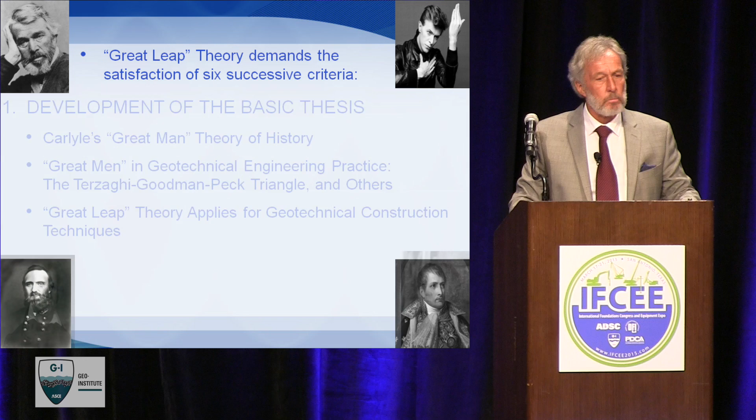Okay, so the guessing game continues, and we still have Thomas Carlyle, we still have David Bowie. That's Stonewall Jackson in the bottom left, and unfortunately that is Napoleon Bonaparte on the bottom right-hand corner.

So, to constitute a great leap, I propose that 6 successive criteria need to be satisfied. And please try and remember these as we go through the rest of the afternoon, because for each of the 3 techniques that I'm going to talk about, we're going to demonstrate how great leap theory is satisfied by looking at each of these successive steps. So, criterion 1, the project, group of projects, or application must be of exceptional and/or unprecedented scope, complexity, and construction risk.

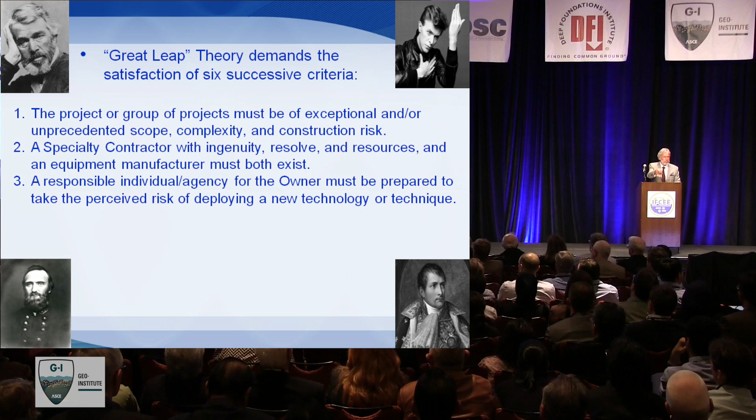Criterion 2, a specialty contractor must exist who has the ingenuity and resources to devise the solution, and there must be a manufacturer that he can work with that can provide the equipment that he needs to implement the solution. Number 3, on the other side, there must be a responsible individual and/or agency on the project owner's side who is prepared to take the perceived risk of deploying a new technology or technique, and who already knows the answer to the question, so where has this been used before? There's got to be somebody on the engineer, the owner's side, that is willing to take that risk.

Criterion 4, the projects that we talk about have got to be successful. This is clear. We cannot have a recurrence of the situation where the operation was a great success, but the patient died. So it has to be a good job or series of jobs. Number 5, to qualify for the Great Leap, details of this project must have been published widely in the scientific technical press, and not just or only as wonderful articles in the trade magazines, no matter how beautiful and informative these may be.

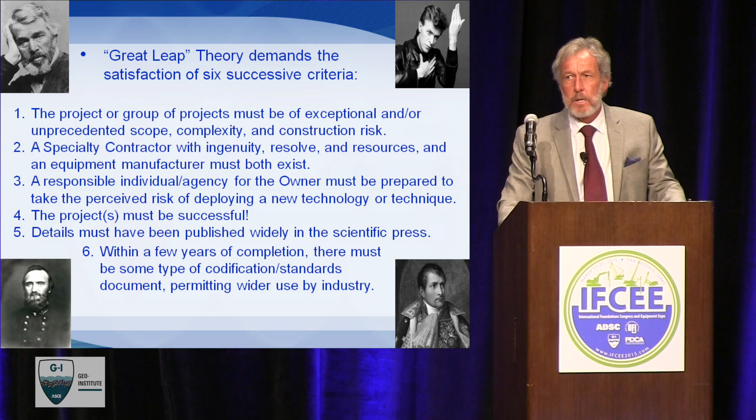And then number 6, within a few years, there must be some formal codification or other influence over construction processes to assure the legacy of the Great Leap and to guide and tutor future exploitations, the dubious defense of patents notwithstanding. In our field, such recognition typically comes through the publications of a federal agency, such as the U.S. Army Corps of Engineers, Bureau of Reclamation, Federal Highways, and so on, a professional society, such as the Geo-Institute, or the efforts of the trade associations, such as DFI, ADSC, or PTI.

The Great Leap theory can be elegantly demonstrated by analyzing progress in a limited number of specialty construction processes.

Professor Terzaghi is now joined on this slide by Admiral Lord Nelson in the top right and Warren Zevon on the bottom left. And Natalie, that one's for you.

You got it. So for this demonstration, I've chosen 3 processes particularly close to my experience and to my heart. I apologize to those of you in the audience whose particular field is not covered, such as ground improvement, the whole wide world of large diameter piling, even anchors, my PhD subject, or micropiles, where Alan and I have worked so closely together over the years. So the 3 that I intend to talk about, and those of you who know me will not be surprised: grout curtains in rock for big dams, cut-off walls for dams, deep mixing methods.

And again, I do apologize that your own particular favorite subject has not been covered, but I would encourage you, if you are moved, why don't you write a similar paper about the great leaps that have influenced your particular technology as well.

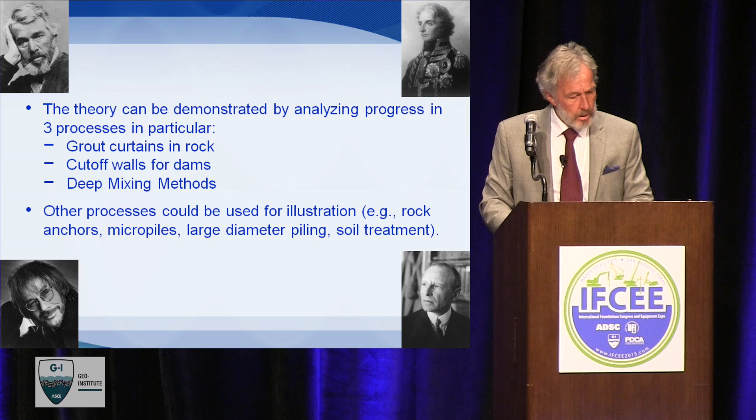Now, I have to come with a government health warning here. In the course of the next half hour or so, I'm going to be mentioning a lot of companies, contractors and consultants especially, with whom I have worked over the years and who are integral to the Great Leap theory, i.e. Criterion 2. So I'm not trying to promote them or endorse them or say that they're the biggest and the best. I'm simply making a historical statement of fact. So please don't not buy me a drink in the bar later if I don't mention your company.

Okay. So with that in mind, then we go to the fun part of the lecture. So this is where we're just going to make it up as we go along. And I have my board in front of me, and so I don't have to turn sideways. And at a time like this, especially before dinner, at the beginning of a conference like this, I don't think it's just satisfactory that you be educated. I think it's important that you be entertained as well. So those of you who have come here with your notebooks ready for fourth-order differential equations will be sadly disappointed. Those of you who would really like to see, thank you very much for that.

Right with you, brother.

Those of you who are here maybe to look at some cool bits of equipment, nice jobs, some of which you may have been involved with, that's the kind of talk we're going to have for the next half hour or so. So, grout curtains in rock. And remember, we have 6 criteria that define the Great Leap. And the first one is that the project's got to be exceptional.

And right away, we say here that there's a group of projects that kick-started the Great Leap in curtains in rock. And they were a group of projects from 97 through to 2007 involving deep remedial curtains in karstic limestone. Now, for those of you who have not had the pleasure of working in karstic limestone, a few words. Limestone has joints in it. Over the years, these joints erode, create caves. Karst is a word in German associated with cave. And so many of our dams in and around the Mississippi Valley are sitting on karstic limestone.

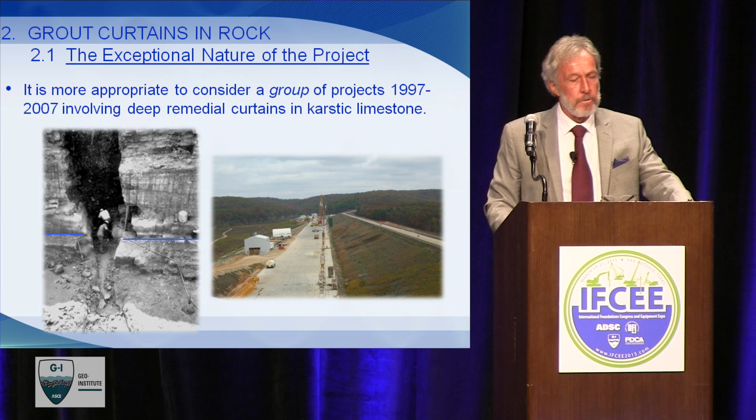Most of these big karstic features you can see on the left-hand side here are clay-filled. And so with time, as the reservoir works on these features, if they haven't been previously treated, this material will erode and will cause a dam safety incident. And we're not just talking about wee dams or little dams. We're talking about gigantic, big dams. That's why we're the conference on large dams. It's not a conference on little dams. And so we have dams that are hundreds of feet high and thousands of feet long.

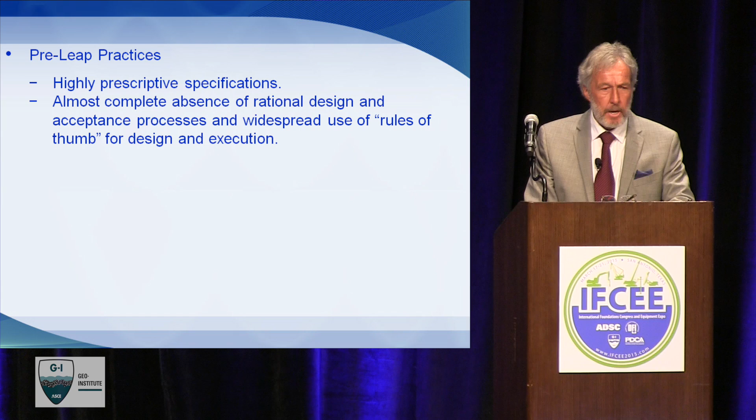So in drilling and grouting, the pre-leap practices, this would have been the state of affairs from maybe 1900 through to about 1985. Very prescriptive specifications. Complete absence of rational design and acceptance processes, and a widespread use of rules of thumb for design and execution. And from the technical point of view, these would have been the features that marked the kind of work that was done until quite recently. And all these, incidentally, are bad things, okay? So even if you don't know about drilling and grouting, just assume that this is just not good news at all. And especially the last one.

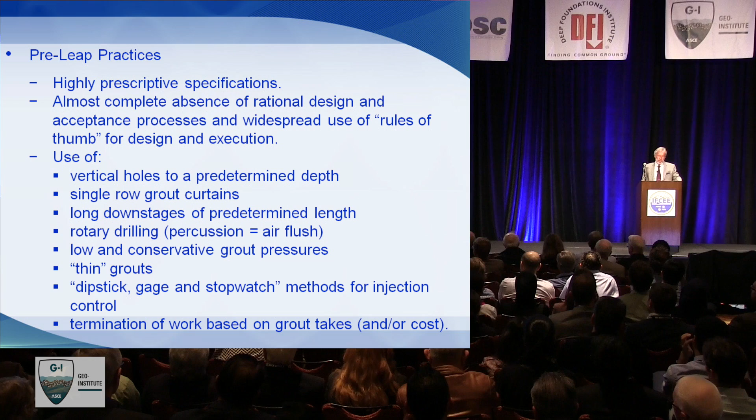Many of our dams that we work on, for example, in the Tennessee Valley Authority, back in the day, were unsuccessful because they were grouted not to a residual Lugeon value, but to a residual dollar value. And so basically you stopped when the money ran out. And when you grout in karst, you've really got to know what you're doing. So these archaic processes were completely unsuited to the demands that we faced in 1997 onwards.

Now, criterion 2, the availability of the technology. So right up until the 1990s, those of you who are in manufacturing and equipment supply will know this, there was a large momentum against new technologies. The notable exceptions were some of the US Army Corps of Engineers people, some of the reclamation people, and Hayward Baker, who promoted early computer-grouted monitoring at Ridgeway and Upper Stillwater. And back in the day then, there was the initial promotion of GIN theory by Lombardi and Professor Deere.

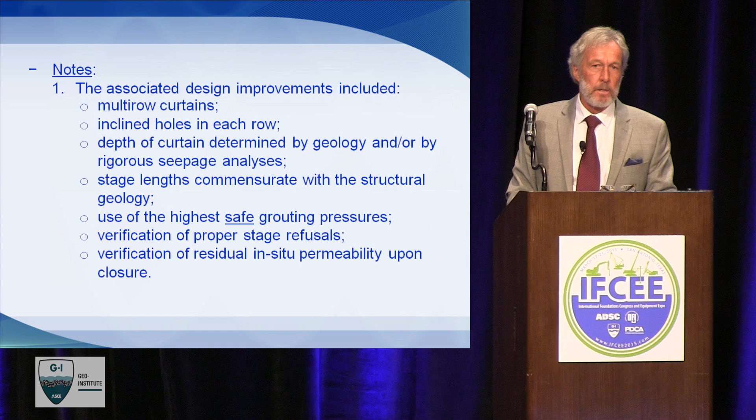So all these improvements come along. Design improvements. There's no such thing, folks, as a one-row grout curtain. It's an absolute fallacy. It's like the check is in the mail and other ruder comments of similar nature. Inclined holes, not vertical holes. The depth of the curtain being dictated by the geology, not by a rule of thumb, and various other things as well. And then once we had built the curtain, verifying the residual permeability of the curtain by doing in situ water tests. So instead of grouting to the dollar or the sack of cement, we're grouting to the Lugeon value or the centimeter per second.

So that's on the design side. That's what the Gannett Fleming team brought. Advanced, what did they do? On the drilling side, they commissioned and had built for them a new generation of drilling rigs specifically targeted for the deep grout curtain market, the Cubex company from Winnipeg in Canada. At the same time, we were looking at ways to drill through our existing dams without causing damage. And so we had the sonic drilling that was first proposed by ProSonic and Boart Longyear. And then we had the double head dry duplex system for overburden drilling as developed by Advanced themselves.

Increasingly, from McCook Reservoir in 2003 onwards, the water powered down-the-hole hammer, produced by Wassara from Sweden. And this is absolutely the bee's knees in terms of rock drilling, combining rotary percussion, i.e. speed, and water for flush and cleanliness of the fissures. We don't drill with air when we're trying to grout fissures.

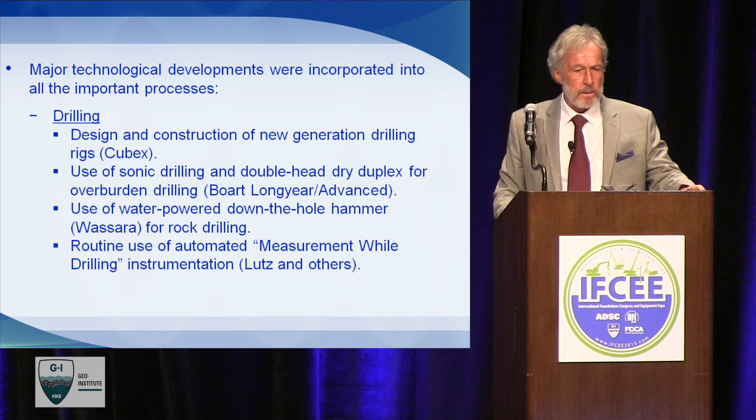And then, of course, the routine use of automated MWD, measurement while drilling techniques, such as offered by Jean Lutz and many others. Of course, other companies, such as Bauer and so on, have their own drilling performance measurement technique. But fundamentally, Lutz came with the first one, and others followed and improved upon it. And then another really interesting thing that's happened over the years is the systematic use of borehole deviation monitoring, specifically using the Robertson geologger and other devices as well. It's really quite important to know where these holes really are 400 feet down.

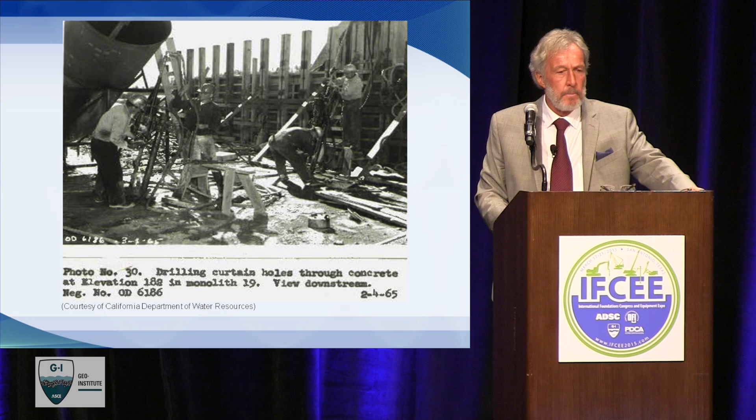So again, we are picking on California here. So here's a lovely shot of some of the early drilling and grouting work that was done on the Oroville Dam complex in the northern part of the valley. And you see these gentlemen in the aluminum helmets on the left, and that's a typical frame-mounted rig, air-powered rotary head, good to maybe 50, 60 feet depth, and who knows what kind of variation in inclination at depth. And in the background, you see another one of these little rigs.

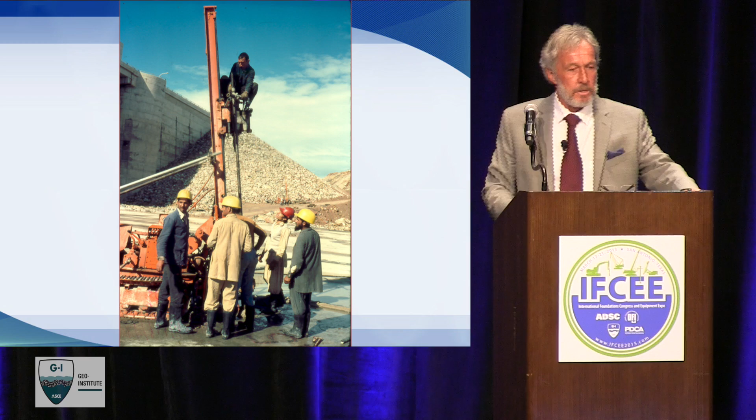And then for those of you who are really into health and safety, this is rather good. Here we have this gentleman at Tarbela Dam sitting on top of the drill head, helping to unscrew the rods as we're changing. So yeah, it's funny, but it's not to be done. So here's then what we do now.

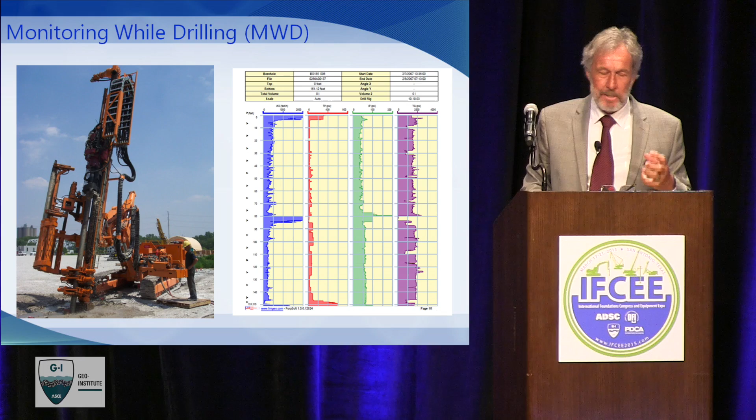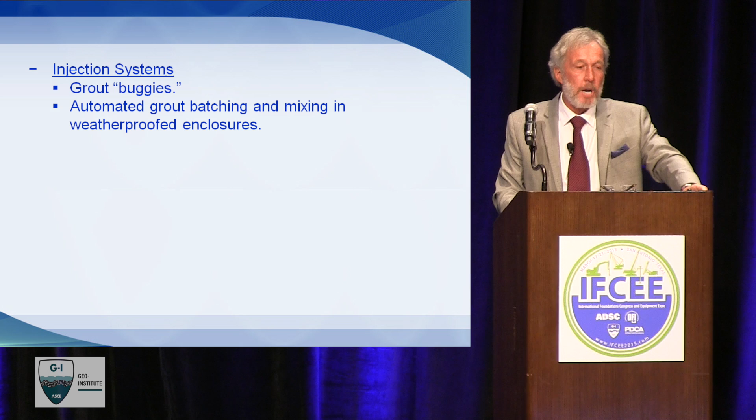Injection systems. What else did Advanced bring to the table? Well, they brought grout buggies. So what? But I'll show you in a minute. Automatic grout mixing, weatherproofed enclosures. Grout mixes. All grout mixes are not the same.

And so my old colleague Alex Naudts in Canada was the first person in North America to introduce the balanced, stable, multi-component grouts. And these give superior rheological as well as stability properties. They're not thick mixes like some people think that we have to inject at huge high pressures. It's not the case. We're getting the best of all the worlds rheologically, from a hydration point of view, and so on, by having a whole series of components, just like making a cake. And depending on who's coming for dinner, you have a little bit of this and a little bit of that to give you the desired properties.

And then we have this whole issue of pressure filtration coefficient. Now, De Paoli and I wrote a paper back in 1992 that nobody read, which is not surprising, except for Alex Naudts. And he picked the bones of that. And so he fully understood what we were talking about. And I'll show you what I mean in a second.

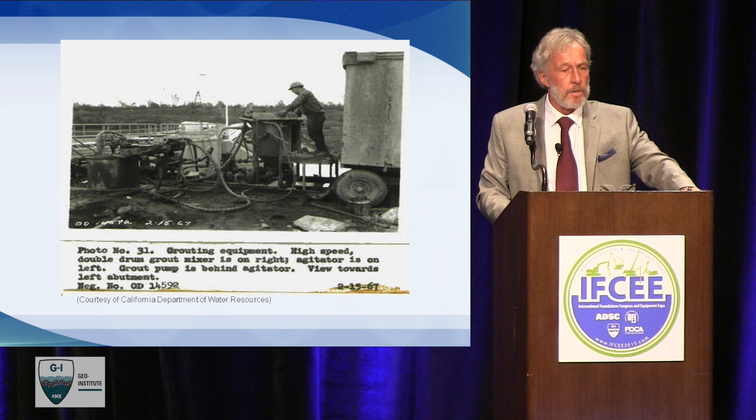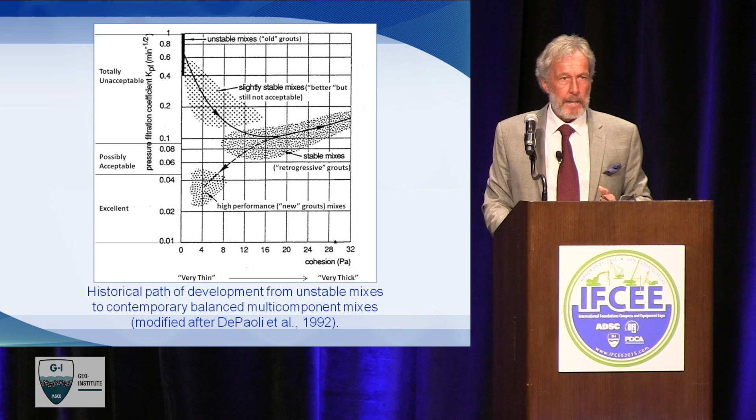Now, computer control and analysis. Those of you who know me would understand that what I know about computers you could write on the back of a postage stamp with a big felt tip pen. But as a user of these technologies, I'm all for it.

One of the first techniques developed after Hayward Baker's initial attempts was called CAGES, Computer-Aided Grouting and Evaluation System, developed by ECO and Alex Naudts up in Toronto. Soon, as a result of our work at Penn Forest Dam with Gannett Fleming, they developed a superior, different system called IntelliGrout. This was recording, analyzing, controlling, and displaying all injection parameters in real time. This allowed the apparent Lugeon theory, which allows us to bring holes to proper refusal, to be adopted—and again Alex was behind that.

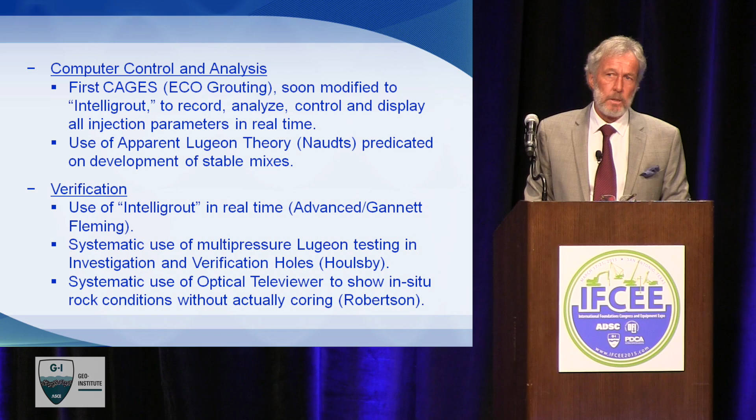We used IntelliGrout in real time to demonstrate that we could grout to a Lugeon or half a Lugeon via systematic use of multi-pressure Lugeon testing, and then the optical televiewer to show the in-situ rock conditions in the curtain without having to core—saving the whole expense of a separate rotary coring machine.

There are other ways, like the GIN method and one or two other things that Golder have introduced as well. But in essence, most of the superior work done in the US runs off apparent Lugeon theory.

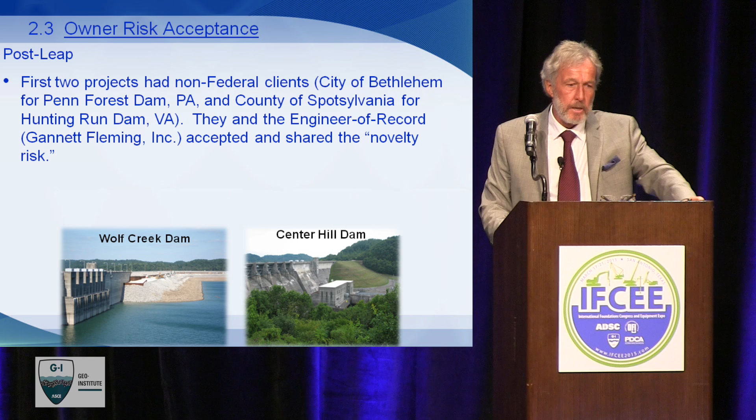So the third criterion: what did the owner think when all this came up? Well, the first two projects done with these great leaps were both non-Federal jobs—Penn Forest Dam, city of Bethlehem, and Hunting Run Dam, county of Spotsylvania. They and the engineer of record accepted and shared the novelty risk. There had to be somebody who would dive in the pool first.

Later, our colleagues in the Corps accepted the novelty risk too, particularly some districts—Louisville, Little Rock, Nashville, Chicago—backed up by headquarters in DC. The one thing in common with all these districts, other than DC, is they basically all sit on karstic limestone. So they had the problem, they had to solve it, but they showed great courage and great resolve in accepting these new methods.

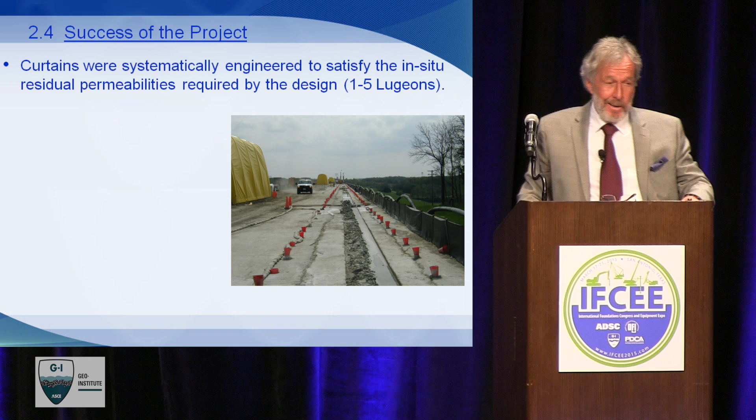So were they acceptable? Did we have success? Well sure we did, that's why I'm going to talk about them. We grouted these to very tight residual permeabilities, 1 to 5 Lugeons, depending on the target. Grout curtains were used systematically, now part of what we call composite walls, where we do drilling and grouting first, then follow up with a diaphragm wall between the two grout curtain rows to prevent long-term degradation due to movement of the karstic material.

Technical publications, the fifth criterion—have we published anything about these things? Well you bet. We've had a couple of really good conferences, New Orleans in 2003 and 2012. The annual conferences of the Dam Safety Association and USSD have tons of papers on this kind of work. There's a couple of textbooks—blatant advertising there—and every year we have the annual short course on grouting at the Colorado School of Mines, at which many of you in this room systematically teach.

And of course, presentations at the Corps' infrastructure conferences on an 18-month cycle. As I said before, we've mentioned a couple of contractors in particular, but this is now the standard of care of superior grouting in North America, and it's attracting attention on a worldwide basis.

Have we codified it? Yes. Those of you interested in this work will be glad to know that Gannett Fleming, under contract to the Corps, have now completed the revised grouting technology manual, issued as of July 31 last year. It's a tremendous piece of work, and grouters all over the world, just like Sam here, are undoubtedly tickled pink to have that on their bedside table.

But here there was a design flaw in that, having cleaned this foundation and taken the clay out of these features, the Corps then replaced that material with clay, which was not really a terribly good idea.

This dam, Wolf Creek, was designed in the 1930s and started work just before the US joined the war. Then it was suspended. By the time it was finished in 1952, you were basically looking at a design that was 20 years old, and in that period a lot of things had happened.

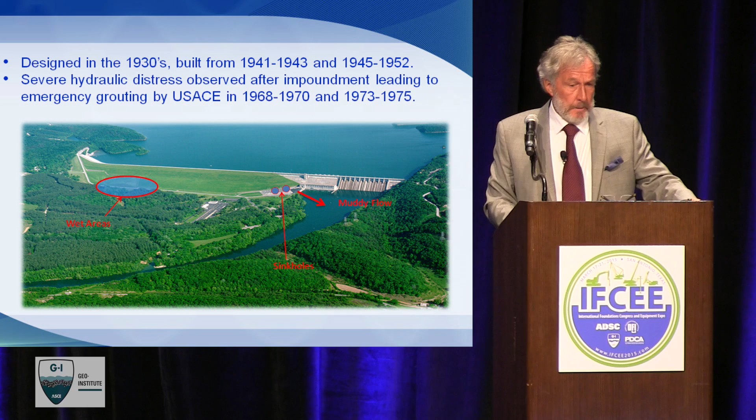So guess what? We have severe hydraulic distress after the first filling. We've got a wet area under the dam and a slowly developing sinkhole or two right there, which is bad news. Those of you who work in dams know that anything like that is simply bad news on a big dam. And then, of course, the infamous muddy flows. This is not good when you have a dam holding back Lake Cumberland and protecting Tennessee.

The primary failure mode was related to the erosion and piping of the soft material and the clay backfill. So back in 1975, the ICOS Corporation, under the leadership of Arturo Ressi, won an international competition to build the first ever cutoff wall in an active dam anywhere in the world.

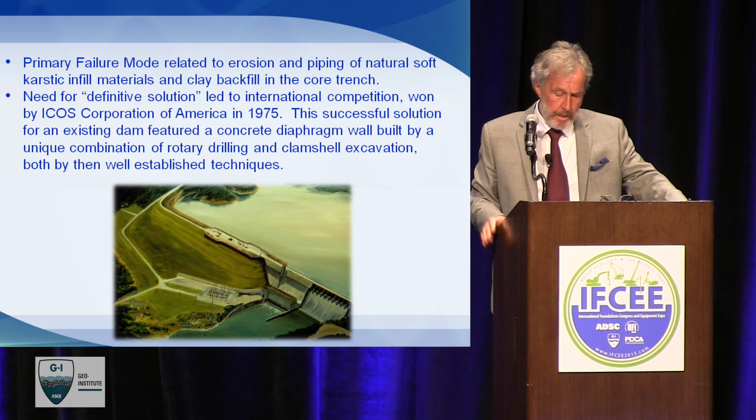This is a photograph from the 75 effort, and this is exactly what they did. There's the ICOS wall in purple. In fact, they had a wall running through the axis of the dam, and then another smaller wall down in the switchyard. But the Corps had actually saved the day in Kentucky in 1968 through 75 by doing all that grouting to repair the damage before the wall was built. So that was how the original wall was built.

It basically used rotary drilling techniques, not secant piles, but large diameter piles, and then that green bit being taken out by a clamshell guided by the adjacent large diameter cased piles. So it was a tremendous achievement that was done.

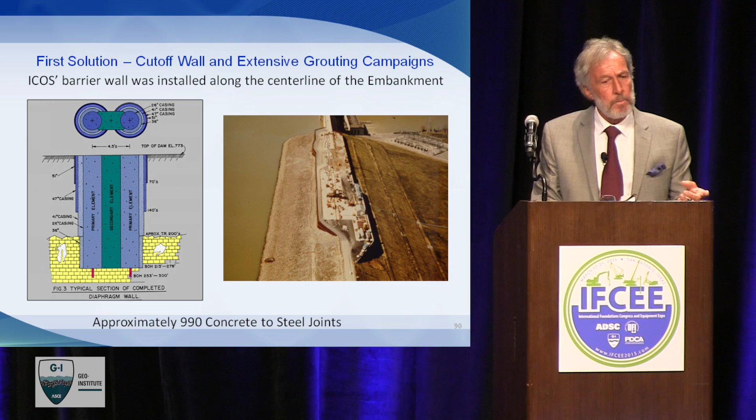However, Dr. Peck was on the original board of consultants, many of you will know this, as was Mike Duncan. And he thought at the time that the wall was neither deep enough nor long enough. Was Dr. Peck ever wrong?

By January 2007, Wolf Creek was judged to merit what we call a DSAC 1 rating, i.e. get something done right now. And there was a justification because of the return to the classic distress indicators.

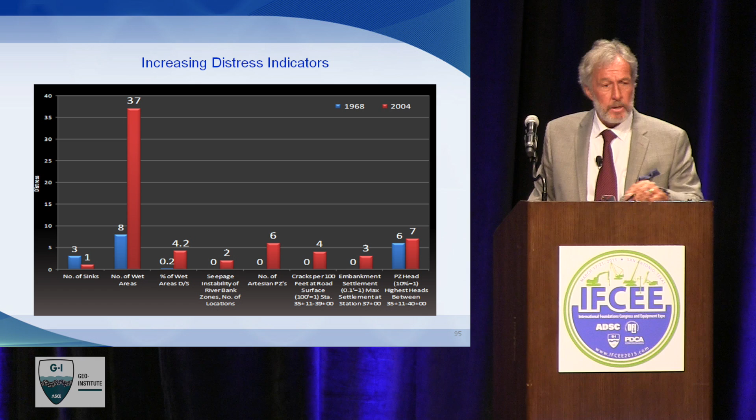Now, for those of you who don't know about dams and distress in dams and so on, lots of things can happen. You can get sinkholes, wet areas, seepage, artesian conditions in the piezometers, cracks in the roadway, settlement. And all these things were in the red zone as far as Wolf Creek in late 2006 and early 2007 when we caught it.

So there was a phase 1, conducted by Advanced and Gannett Fleming, an emergency grouting operation, but the intention of the Corps was always to build another diaphragm wall - longer, deeper, better, more expensive.

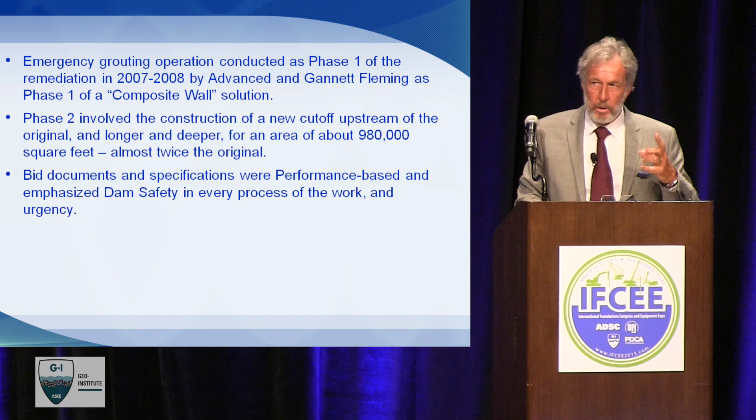So the Corps, again very prescient, released the work on a performance-based spec, emphasizing dam safety in every process of the work, as well as urgency. This is a classic example of one of these great leaps in business. Now, this problem attracted international interest - our colleagues in Germany, France and Italy were equally as interested as were our US companies.

It was obvious to everybody that what had been used and done back in the 1970s was not going to work the second time round. And so a lot of new things had to be done.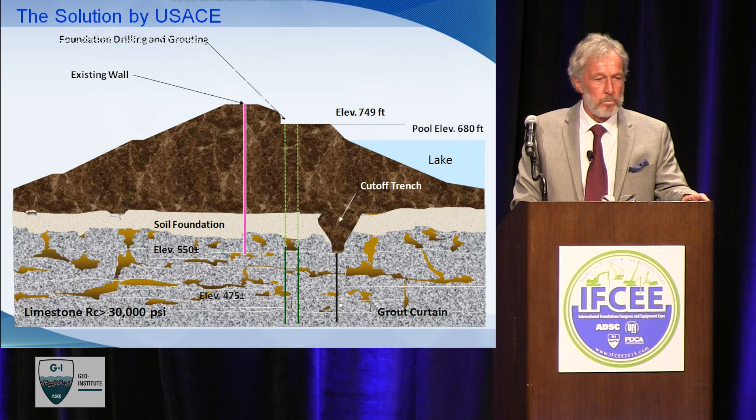And then between the two lines of the grout curtain, a deep diaphragm wall. So you can see it was built on the downstream side to save quantity, and it would completely negate the purpose of the first wall. So that was what was planned.

And just to summarize again, there's the wet areas, there's the muddy flows, the sinkholes, the existing wall that was done by ICOS, and then here's the new wall that is upstream, longer, and deeper. And I'll come to the protagonists in a minute.

So who are they? As you know, the job was done by Trevi Soletanche joint venture. Who are Trevi? Well, they had acquired the ICOS company in 1997, and so they had the mentality of what had gone on at Wolf Creek first time round. They also had picked up Rodio, who were a very fine Italian company at the same time. They had very good and similar experience at Walter F.

George Dam in Alabama. We'd also worked, as Nicholson, we had the joint venture with them at Beaver Dam in Arkansas, building a secant pile cutoff. Because of their other work, they had also particular experience in directional drilling and in water-powered down-the-hole hammers.

Soletanche, so who are Soletanche? Right? One of the great companies. Pre-war French subsidiary of Rodio. And of course, during the war, they were French, therefore they won. Rodio were Italian, and unfortunately, they had lost. And so after the war, basically, Soletanche became the dominant player in the whole Soletanche-Rodio empire. And then, of course, Soletanche combined with Bachy some years ago.

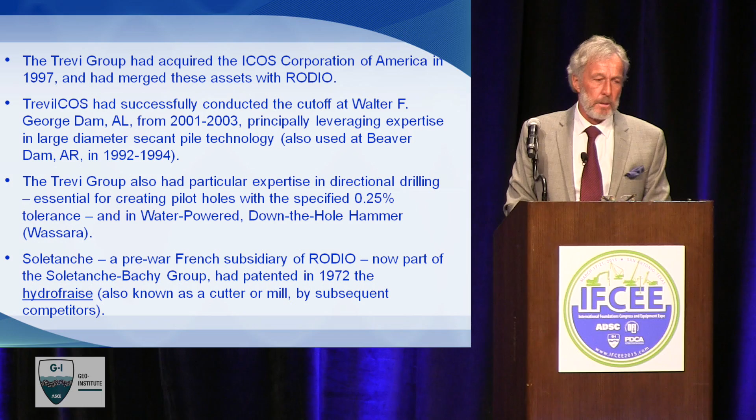But the key thing that Soletanche brought to the table was they had patented in 1972 the hydrofraise, with apologies to my French friends, also known as a cutter or a mill, and produced by subsequent competitors. Now, what's so special about a hydromill? Well, this is literally the bee's knees.

This is a big frame that you aim at the ground, you turn on the wheels, you turn on the pump, and this machine chews itself into the ground, creating a wonderful, straight, regular slot. And if you do that enough times, you create a diaphragm wall. So it's very simple. That's as complicated as it gets today on the hydromill.

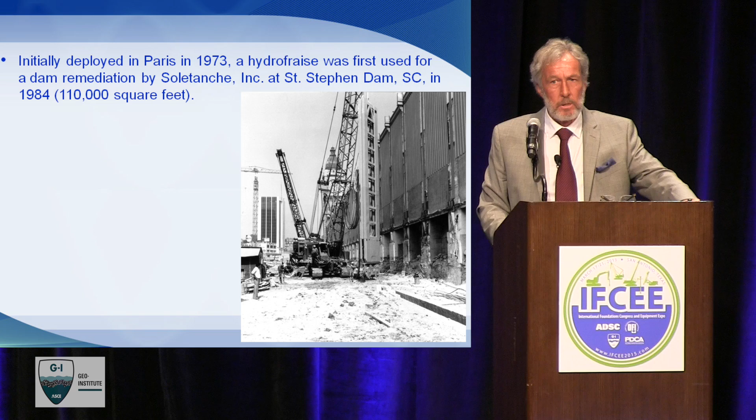So according to the information that Tom Richards gave me, it was initially deployed in Paris, 1973, and it was used for the first time by Soletanche on a dam for remedial purposes at St. Stephen Dam, South Carolina, in 1984. So Soletanche had a very long track record working on dams in the US.

Thereafter, it's been used by many other contractors, such as Bauer and Bencor and so on, on 8 other major dam remediations prior to 2008. A lot of work. And if you were able to read this, this would show that since 1975 through to 2005, there's probably been about 21 or 22 major jobs done in the US. And I think it's the blue highlights those jobs that were done using the hydrofraise. So right up until 2008, a pretty steady 1 or 2 dams a year in the US.

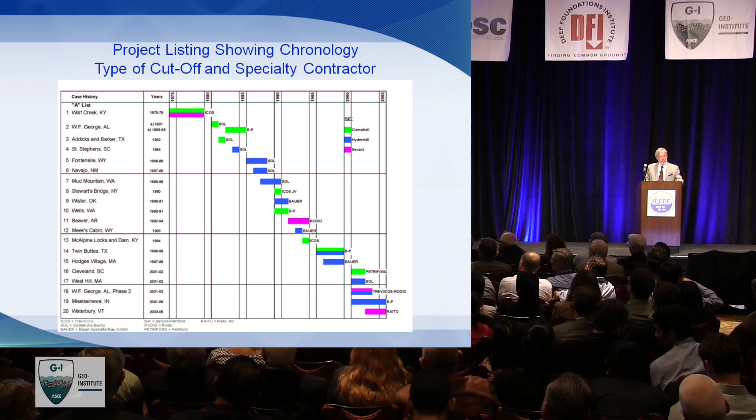Many of these projects, say, done by Trevi's partner at Wolf Creek. The deepest wall that had been constructed before Wolf Creek was, in fact, at Mud Mountain Dam, over 400 feet deep. And most recently, we hear from our friends in Italy that they have now taken this to 800 feet at Gualdo as a test and achieving 0.13% verticality. So basically, the hydromill allows you to drill very deep into hard material and guide it to a fraction of a degree of verticality. It's an extraordinary machine.

I always used to describe it as like a Formula One racing car, that when it worked, it went very fast, but it would spend a lot of time in the pits. But more recently, the hydrofraises, the hydromills, have become much more reliable from the technological point of view.

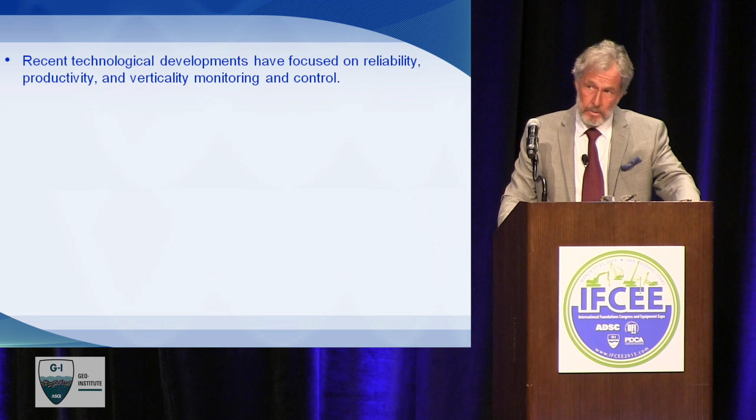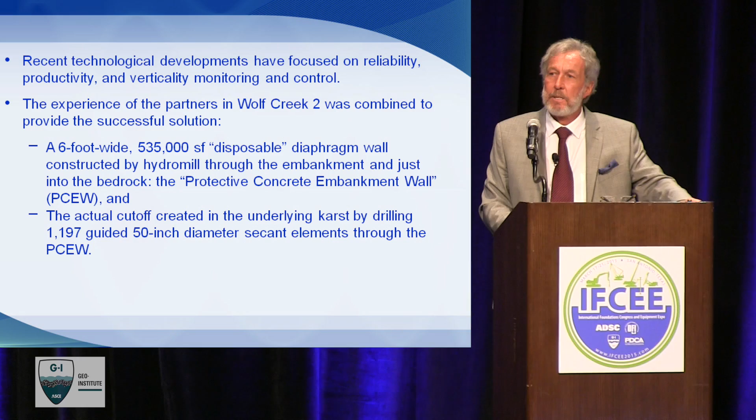So, obviously, Trevi and Soletanche get together to do Wolf Creek 2. And how do we design that? Well, first of all, we're going to build a 6-foot wide disposable diaphragm wall through the dam itself to protect the dam from the effects of the rotary drilling underneath. So it was a very clever concept. And this is what, in fact, was done. So here's a little animation just to summarize better what I just said to you. So we've got the embankment, the poor stuff, and then the rock.

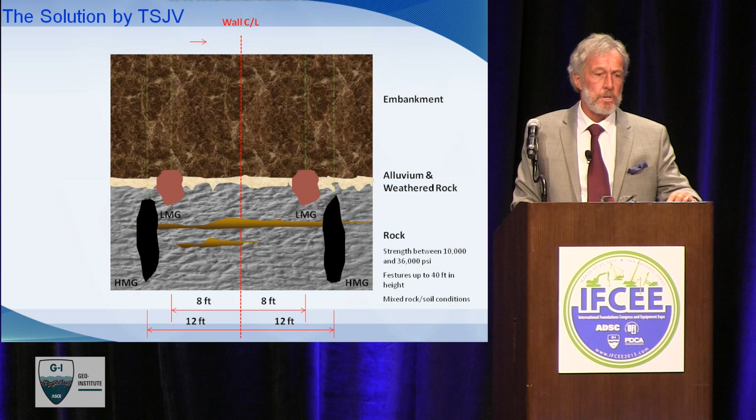Here's the center line of the wall. First thing to do is to do the drilling and grouting of the rock on either side. Remember, this is a composite wall. So what we're trying to do is to prepare the ground for the diaphragm wall. Then the interesting thing that the joint venture did was then elected to do an LMG operation to treat specifically the interface between the dam and the rock to further protect the ground for the installation then of this 6-foot wide diaphragm wall, which was taken down just to the contact.

Having protected the dam, the next stage then was to build the cutoff in rock. And this was achieved with, first of all, directional drilling, and then following up with, I think, 50-inch holes at like 30-inch centers to create a secant wall in the rock under the dam having been protected by the big diaphragm wall. Hayward Baker were engaged to do that LMG work. They completed also the HMG work that had been begun by Advanced and Gannett Fleming.

Many of you will have seen these slides already, but there was a lot of iron, as the contractors say, on this job at any one time. So here's the big 6-foot wall being constructed in the foreground. Then you can see the directional drilling, the Soilmec machines in there, controlled to within 0.1% accuracy at depth of almost 300 feet.

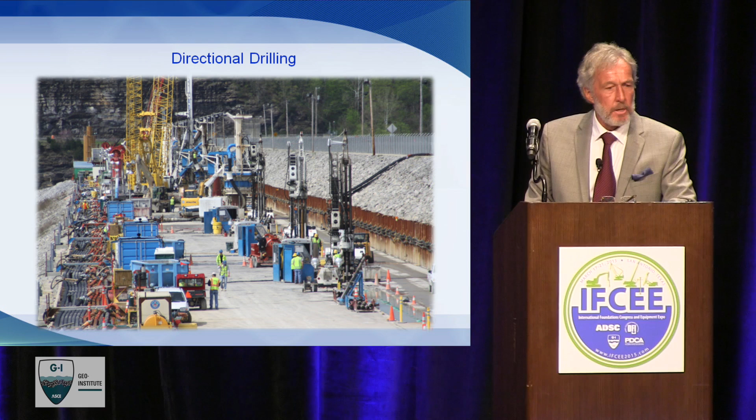And then the Wirth pile top machines installing the secant piles through the wall and into the bedrock to create the cutoff. So here you have 50-inch piles at 31 or 35-inch centers. Maximum depth 277 feet. Okay, so that was the contractor side, right?

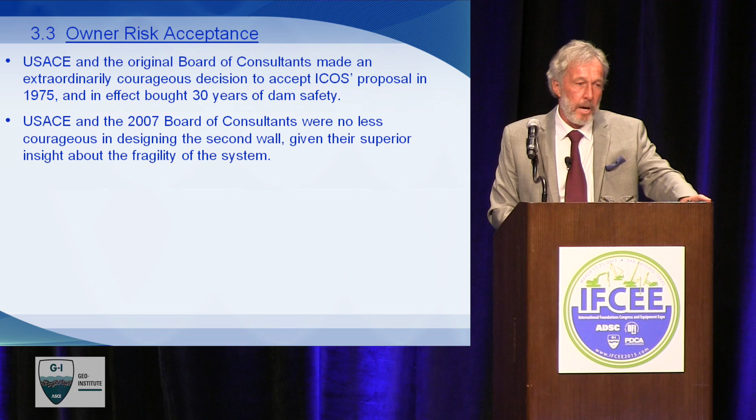Criterion 3. If you were the owner, would you have accepted it? I would have been scared witless, quite frankly. But let's remember the Corps was very brave back in 1975, and its board of consultants were very brave. And effectively, although flawed, that original work bought 30 years of dam safety to the Corps of Engineers. And I think that the Corps and the 2007 board were no less courageous in designing the second wall, given their superior knowledge as to how fragile that dam really was. It was just on the edge.

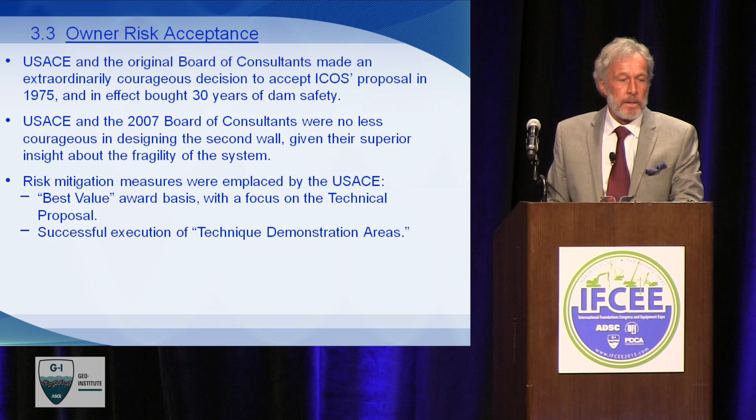Now, the Corps didn't go into this blindly, and they put a lot of risk mitigation measures together. So they awarded this job on the basis of best value as opposed to low bid. Focus on the technical proposal, very important. First, before we could move into the production phase, we had to do technique demonstration areas, full-scale tests on site to show that we could do the work and do it safely. Very high levels of QA/QC. Contractor's side and the Corps side each had over 30 people full-time on QA/QC every day.

Implementation of a very intense instrumentation monitoring plan to make sure that the dam was monitored during its penetration and during its remediation. And then there was actually very effective partnering. Partnering is often something that people turn their noses up at, but partnering was essential to the success at Wolf Creek. And not only did the two sides get together, but the Corps had its own board of consultants, but the contractor also appointed its own equivalent board of consultants. And so they got together at different levels.

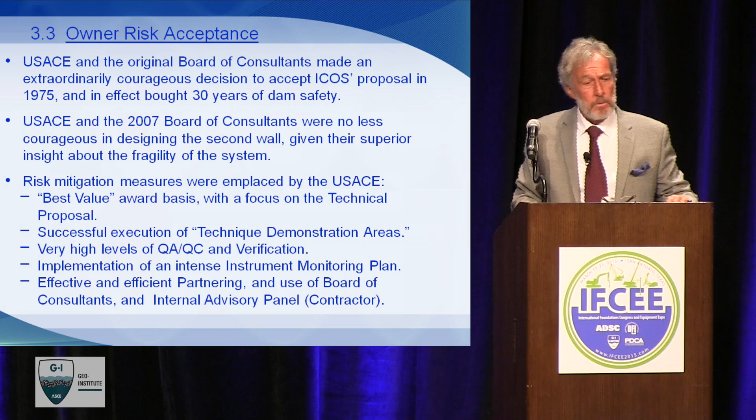And so, especially in the early days, when things were maybe a little bit hairy from different points of view, there would be these massive technical meetings at which many things were thrashed out over a couple of days. And to the great credit of the contractor and the Corps, these things went very well. So sure, as you all know, it was a success. Only one of 1,197 piles went outside the verticality criterion. Everything else was satisfied, without question. The job was finished early.

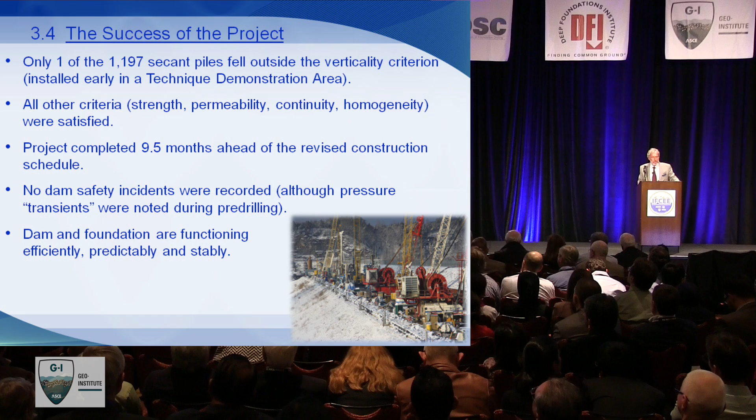No dam safety incidents. But I will say that when you drill with the water hammer, when you do grout with the HMGs, you will have transient pressure spikes in the piezometers. These happen. But as long as they're transient, your dam, which is 300 feet high and 6,000 feet long, is not going to feel them. So we're not going to explode the dam or hydrofracture it like some people think that don't fully understand what we're doing. Since then, all the indications on the job are that the dam and the foundation are functioning very efficiently. It's been a beautiful and extremely well-monitored project.

So, have we published? Well, you bet. And so, there's been at least 12 technical publications so far in the usual suspect conferences.

It's been published all over the world, Europe, US, and South Africa now as well, I understand. The Corps and the contractors have really put together a lot of very good reports that are available to you. And codification, sure. The Risk Management Center of the Corps of Engineers, headed by David Paul on an interim basis, is producing an engineering manual on cutoff walls for dams and levees. And this will enhance the existing EM. And that's going to be published later this year.

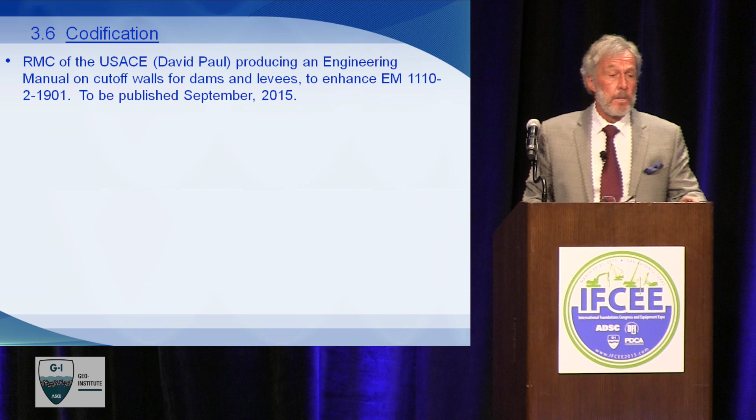Reclamation, my friend Mark Bliss, is also finalizing a new design standard on cutoff walls to be published later this year. The DFI Slurry Committee, Gianfranco Di Cicco, who I believe is here, is developing a similar guideline. Gianfranco's a wee bit further behind on schedule, but that is apparently going to be ready to go next year. And all of these publications will give new blood for the existing ICOLD Bulletin 150 and the European standard. So you can see the impact that one successful job will have on world practice, provided it is published and codified properly.

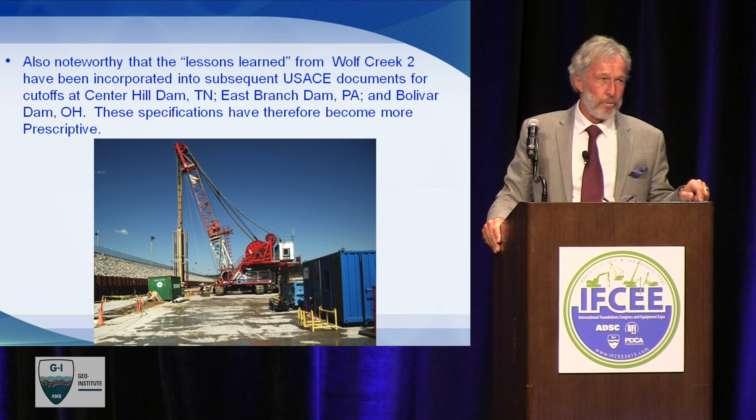And the other interesting thing, and the contractors amongst you know this, is that there's been a lot of jobs done since then. Center Hill Dam is underway with Bauer. East Branch Dam in Pennsylvania is underway with Bencor Lane. And Bolivar Dam in Ohio with Trevi. And the specifications for these jobs have become more and more prescriptive because the Corps is now saying, we understand what you're doing, you don't need to tell us anymore. So please, we'd like it done this way, and if you can do it like Wolf Creek for half the price, that's great. So that's a big influence on practice.

Now, when I was putting this talk together originally, I was going to introduce a fourth topic, which was micropiles. And I soon realized that we simply wouldn't have time, and I didn't want to run over. So what I've done here with my third topic, and we are getting pretty close to the end, Alan, is to make this a little bit briefer and a little bit more of a summary. And I'll run through this a little bit more quickly, because I don't want to delay proceedings too much here.

The deep mixing methods, many of you know about this from hearing George Filz and the other great specialists talk about this, were developed separately and at the same time in Japan and Sweden in '67. And were introduced to the US, we think, in '86 by Mr. Taki. And I'm not going to show that slide, so don't get too happy about that. So between '86 and 2008, there's a lot of large projects done in the US and Canada using deep mixing. But the market, we always thought, was very erratic in terms of the annual volume. Some years, nothing. Other years, 100 million.

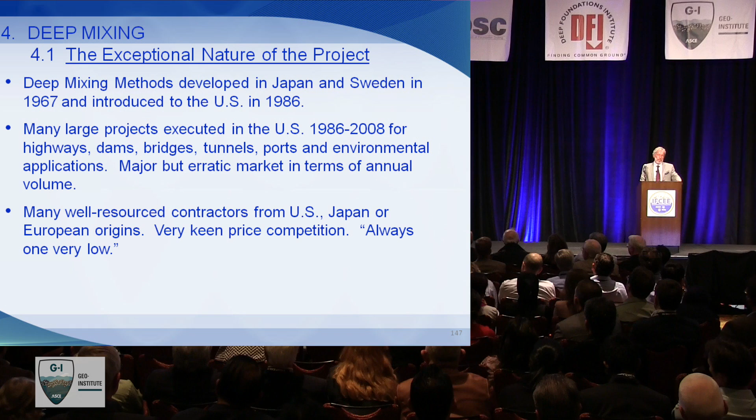A lot of really good contractors in the US from native origins, from Japan, or from the European companies, and always with very keen price competition. And my experience acting for the owner was always that on any one deep mixing job, somebody was way low. Not always the same guy, usually the same guy, but not always. And so really it kind of tore the backside out of the business to a large extent. Now all these applications until '08 were vertical axis mixing, exactly what you think that deep mixing is all about, you know, the big augers and all the rest of it, but relying on traditional concepts, methods, and monitoring.

Some of the project outcomes were not really satisfactory. A lot of debate, a lot of unhappiness, differences in expectation between what the owner thought he might get in deep mixing and what the contractor thought he was providing. Neither of these jobs that you see here were anything other than completely successful, incidentally. Just to say, that's Raito's project down at Clemson on the left-hand side using their 6-auger machine.

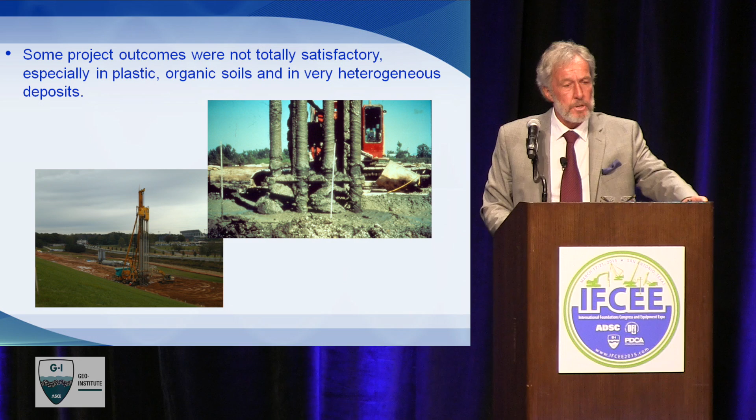Then what happened? We got Hurricane Katrina, Hurricane Rita in the fall of 2005. And all of a sudden, Corps of Engineers went into overdrive, of course, to repair not only what was going on in New Orleans, but some of the other structures that could be affected by hurricanes as well, such as Herbert Hoover Dike. Now, for those of you who haven't been down there, Lake Okeechobee is basically that big hole in the middle of Florida. It's 50 miles in diameter, it's 160 miles around the outside, and on a good day, it's about 12 feet deep. So you can't quite walk across it, but if you had stilts, you could.

The problem is that water gets into it 7 times quicker than it can get out in a hurricane, and as the water rises, it causes distress in the very heterogeneous materials from which the dike is composed. So it became a DSAC 1.

So in New Orleans and in Herbert Hoover, immense challenges. In New Orleans especially, the challenge of time. We could not let New Orleans fail again. And so all the projects that were in place in New Orleans were up against a tremendous time barrier. And these are huge jobs. 100 rig months, double shifting, millions of cubic yards of deep mixing, the largest job ever conducted outside of Japan at that time.

Herbert Hoover. Your task, Jim, if you choose to do it, is to create 21 miles of cutoff, 90 feet deep, through materials that in any one section vary 20 times from peat through soil to hard limestone. And, oh, by the way, we want it done in 4 years, please, competitively.

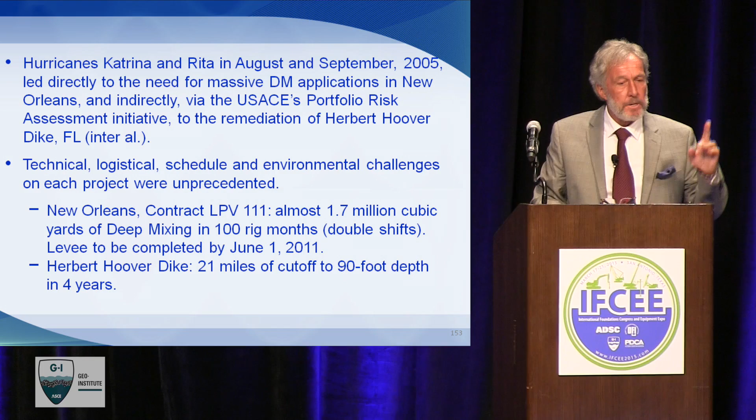So here's just a view of what we're trying to do there. Herbert Hoover Dike on the left-hand side, build that wall through the dike, through all these heterogeneous materials, not to cut off completely the seepage from the lake, because we'd have to go down 200 feet, but as a hanging wall to protect the embankment and its immediate foundation from internal erosion as the lake would rise.

And then on the right-hand side, the footprint of LPV, Lake Pontchartrain and Vicinity Contract 111, about 5.2, 5.3 miles of deep mixing to be done to allow the levee to be rebuilt and raised.

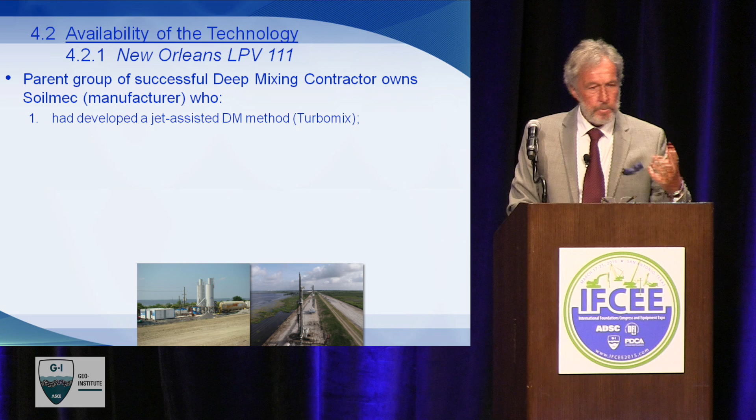So who did we have in New Orleans, first of all? There was a contractor, a manufacturer who had experience in deep mixing, who could supply a lot of rigs very quickly, had good links with a Japanese company called Fudo Tetra, could provide 8 different automated mixing and batching plants, because this was fast track, and had advanced mixing parameter display, control and recording systems, telemetrically sending back all the details to mission control.

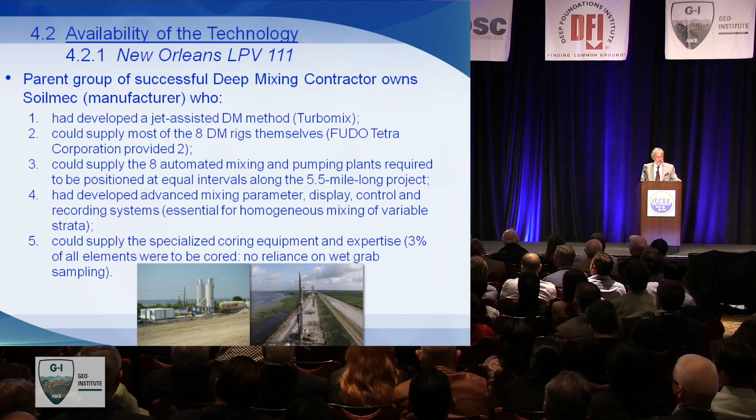It's very difficult to mix the soils in New Orleans. And so together with George Filz and Eddie Templeton and the gentleman from Trevi and Soilmec, there were tremendous advances made in the technology. So this is what we were trying to do there. And when I say we, taking very minor credit, Filz and I were on the internal board for the contractor, trying to keep him honest. It didn't work.

So here's the old levee, which has been degraded. And now the general contractor, Alberici, Archer Western, preparing the working platform. And so here's the boys putting in the deep mix columns. Now it always goes like that, doesn't it? Just absolutely painless. So there's the deep mixing in the ground to improve the soil, and some of the soil has the consistency of peanut butter.

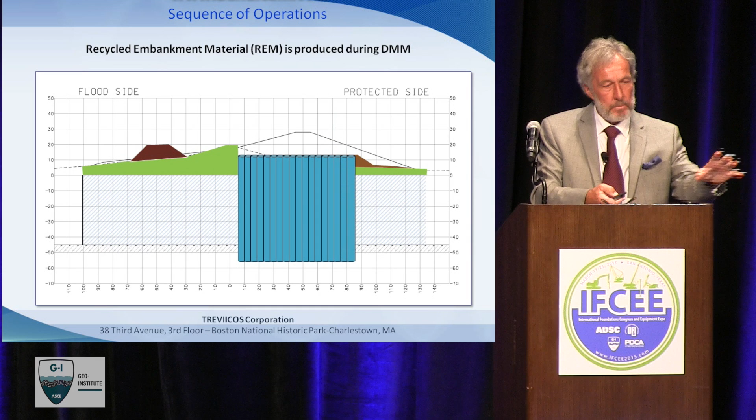And so the next stage now is to build a little safety berm there just to protect the work from possible storm surge. Put on the geotextile, and then use the spoil that had been created by the deep mixing. Now, we couldn't call it spoil. That would have been politically incorrect. It was recycled embankment material, which was then used as the heart of the new levee. It's a wonderful engineering material, just terrific.

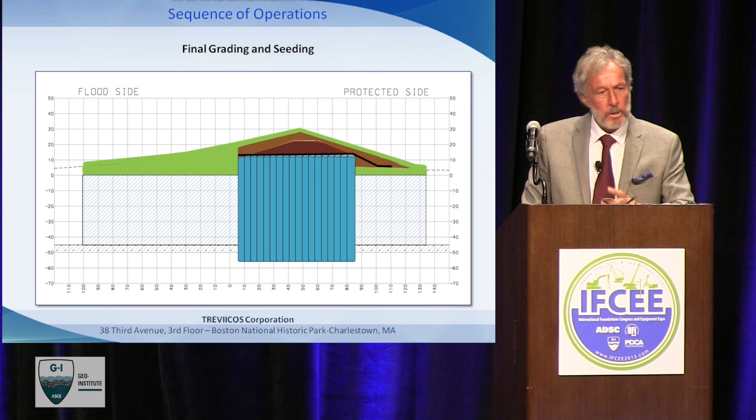And then after that, all greened up and all nice grass everywhere. It's amazing what you can do for 350 million these days. So that's basically how LPV 111 was done. And the ground had to be improved because it was such a sensitive environmental area, the Bayou Sauvage and all these other places there, that simply they could not permit the footprint of the levee to expand.

So what about our colleagues at Herbert Hoover Dike? Remember, we've got to build 21 miles of diaphragm wall very quickly. So what did the Corps do? This time it said, okay, industry, you tell us what you can do. And it had a competition, and 3 people were qualified, each with its own different method. So Trevi came in with the cement bentonite panel wall using the grab and the mill.

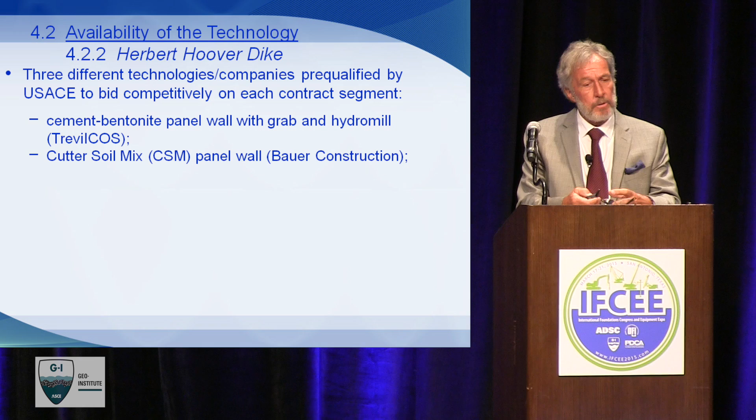Bauer proposed the cutter soil mix, which is a very interesting technology, basically a combination of diaphragm walling and deep mixing. Been around since about 2003. And then the really interesting one, from our point of view as the panel of consultants, was TRD, trench remixing deep, the continuous wall as offered by Hayward Baker.

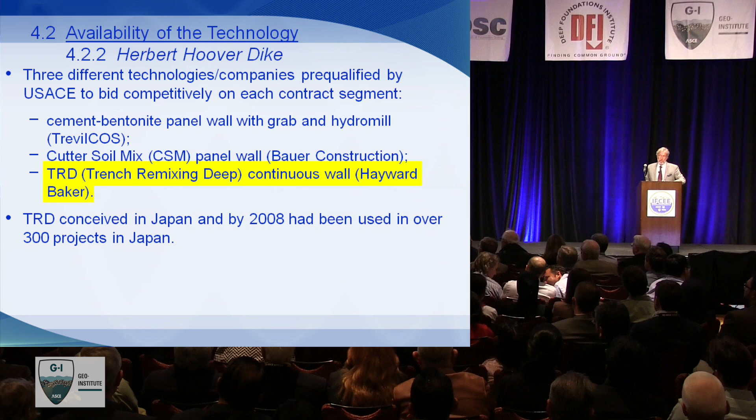And that's really what I'd like to focus on for the next and last 5 minutes here. No disrespect at all to conventional walls or the terrific quality of the CSM that Bauer can provide. So TRD, like all these systems with 3 initials, conceived in Japan. Every Japanese technique has 3 initials. And by 2008, it had already been used in over 300 projects in Japan and in parts of China as well.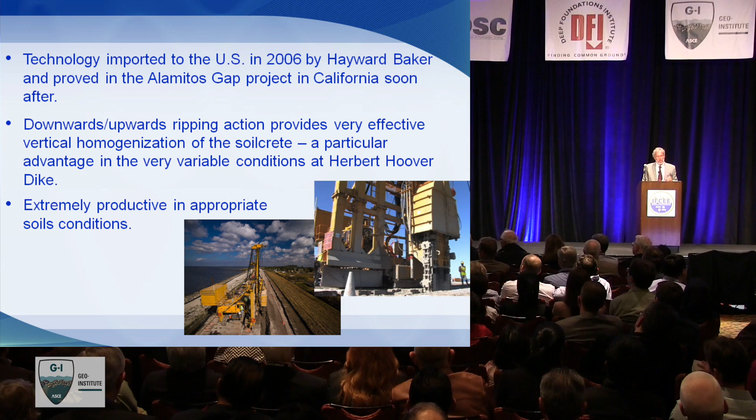So I had written a book back in 2000 for the feds on all the deep mixing methods at the time. And basically, they were all vertical axis techniques. Over on the left-hand side there, either conventional low pressure or jet-assisted, like turbojet. And that was the test columns that were done for a dam out in Kansas.

Then along came TRD. So now we suddenly have a different kind of deep mixing method. And then along came CSM and an equivalent called CT-jet, which uses higher pressure. So the world of deep mixing has greatly expanded as a result of these new technologies, which were used with great success at Herbert Hoover.

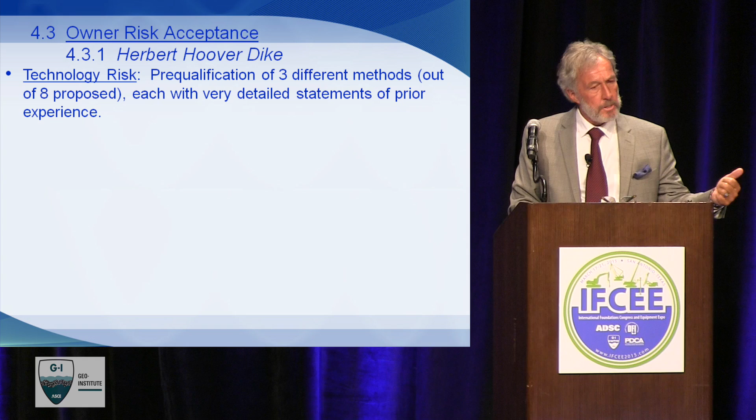So what about the risk? What did the Corps think? Well, it went about managing its risk by, as I said before, inviting industry to propose. And out of 8 different methods, 3 were selected, and then each of the successful contractors was then bid against each other competitively on different segments of the project. So the Corps got the technology, and they got the competition.

They broke down the job into little bits. Well, each bit was still about 3 miles long, right? So it was good work. But then different contractors could work at different parts at the same time.

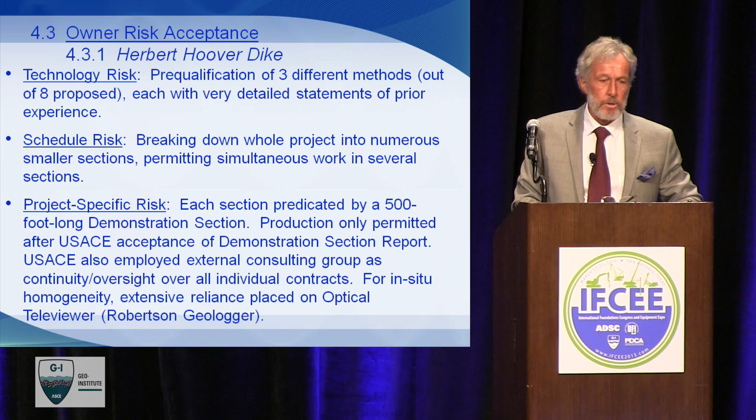They also had project-specific risk, so very strong verification requirements on the project, including a 500-foot demonstration section on every major contract. So we had a chance to look at the stuff, test it, water test it, make sure it was cool before it was then used. As you can tell, this very happy gentleman here on the left works for the contractor. He's just taken another good sample.

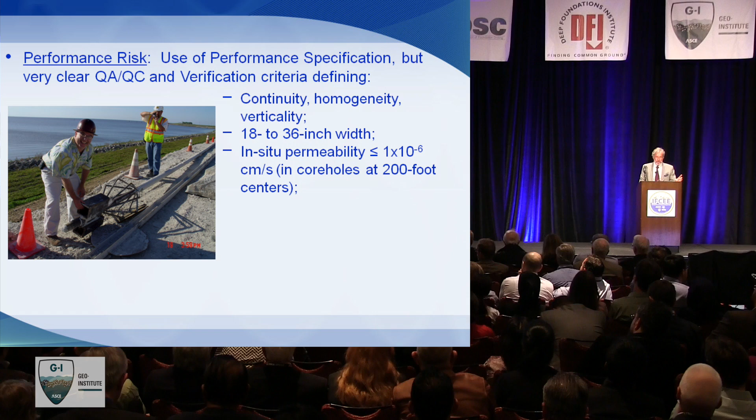And although it was a performance specification, the documents were crystal clear when it came to what the goals of the project were. Continuity, homogeneity, and verticality. What the width could be. What the in situ permeability could be. Measured in situ, not on samples in the lab, where all your testing is samples that you've taken in the field. This is in situ permeability monitoring. Satisfaction of a strength requirement, and satisfaction of chemical compatibility with groundwater and soil.

So what about risk acceptance in New Orleans? Those of you who have been down there have heard who dat once or twice before. And each of these big machines was named after something from New Orleans, most of which were very rude.

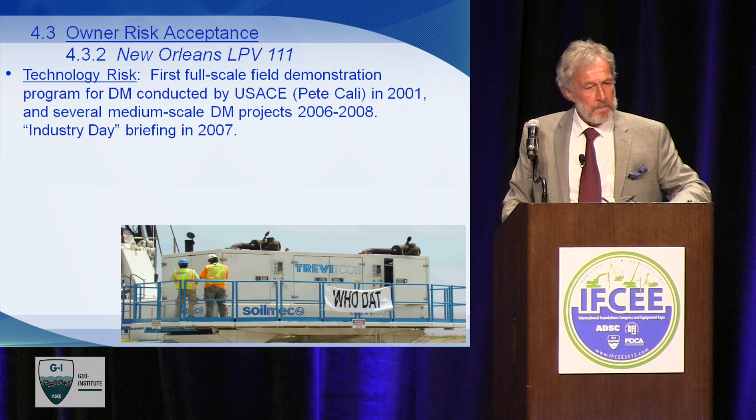So we, in fact, had done a demonstration project with the Corps, Dr. Pete Cali, in 2001. But our results were shelved because deep mixing was far too expensive and it was far too new for the old boy network in New Orleans. And so Rita and Katrina changed that. And so the Corps then briefed industry, 2007. Everybody came, was told about the work.

And then when this job was bid in 2008, we used early contractor involvement. So the project was actually bid with only 10% completion of the plans and specs. And it was awarded at 35% plans and specs. So as the contractor was mobilizing, the rest of the specifications were being created and agreed as part of this early contractor involvement. What a terrific way to manage schedule.

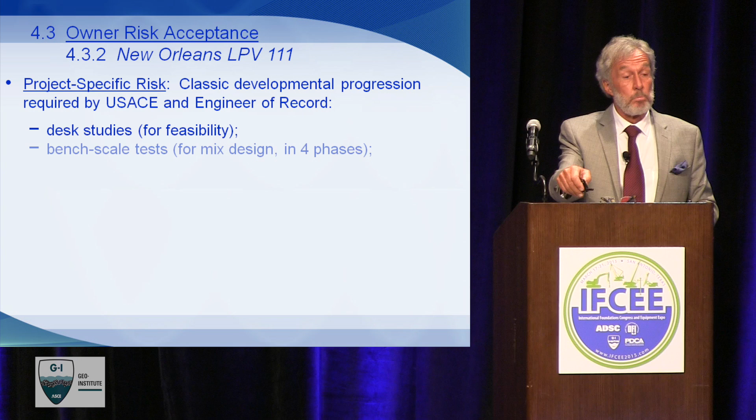So desk studies, this is classic deep mixing 101, as you know. Bench scale tests, full-scale validation tests in the field, intense monitoring of the production works. That's the project-specific risk and the performance risk, performance specification, very clear QA/QC, 3% of all the elements cored, not wet grab sampled, cored and tested.

So these are all the statistics, but there are several people here who have been involved in that, and they will talk your ear off all night about how good they were on this job. And I have to say, even though they say it themselves, very effective use of the contractor's internal advisory panel.

All 3 contractors were finished in early 2012. We learned a lot on the way, especially about heat of hydration and about pressure filtration of the grout and so on. But every single inch of the 21.3 miles was accepted by the Corps.

Have we published? You bet. Those of you who were with us in New Orleans in 2012 had the infinite satisfaction and delight of sitting through a whole session on LPV 111 with 6 papers. And there were 6 TRD papers presented at the same conference, and lots of papers on CSM as well.

We're still getting papers on these techniques at the ASDSO and USSD conferences, and it's been published all over Europe and in the ISSMGE bulletin as well. And it's got a chapter in our textbook devoted to dam and levee remediation. So it ticks all the boxes.

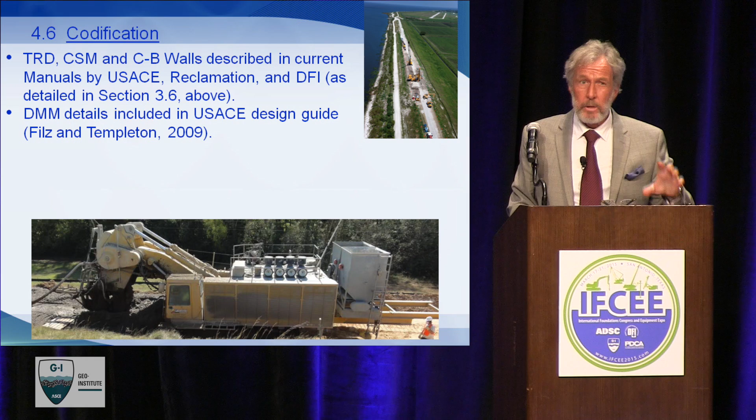Now, the other thing is for codification, and we're very close to wrapping up here - all these techniques are described in the current manuals by the Corps, Reclamation, and DFI, as we mentioned before. So all the existing contractors have their ideas in codification. And now it's permitted other companies, such as DeWind here with their own trencher, to come in and start doing similar work.

So not only is it codifying to protect the quality, it's also encouraging competition to have similar systems, and that's a great thing. And then a lot of these lessons are incorporated in the 2013 manual headed by Mary Ellen Bruce and her colleagues George Filz and so on.

So here we have one-pass trenching now developed by other people. Okay, so I really appreciate your patience. We're almost there, and I'm just going to pull this together with a couple of last slides now.

So remember I told you right at the beginning that all these views here would come back and haunt you. So this is the one from drilling and grouting. And this is the setup that was used to run the grouting, level 3 setup at Wolf Creek. And here's the Great Leap here.

It comprised a group of major developments and processes: materials, technology platforms, design complex. It was implemented under the vision of one contractor consultant team in response to a major market need. It ticks the boxes. It was a Great Leap.

The concrete cutoffs - my thesis says that the Great Leap had 3 steps. The initial acceptance, first of all, that you could actually build a diaphragm wall through an existing dam with minimal dam safety risk. Wolf Creek 1.

The development by Soletanche and others of the hydromill, fundamental. And then the technological advances that were made in response to the technical and dam safety challenges of Wolf Creek 2. That's the Great Leap.

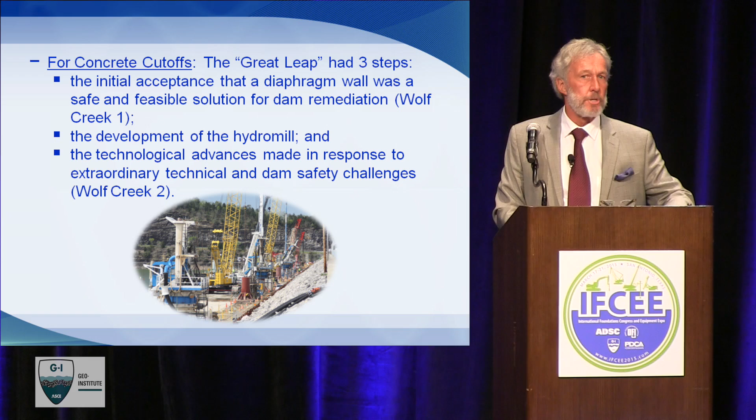What we're doing now at East Branch, what we're doing at Center Hill and so on, is almost taken for granted by some people in terms of the quality and the way in which this work is now being done. But maybe that's the way it should be till somebody else comes along with the next Great Leap.

For deep mixing, in my opinion, the Great Leap of 2008, inflicted by the Corps of Engineers, was the implementation of a newly imported technology, i.e. TRD, and major enhancements to a traditional technology, i.e.

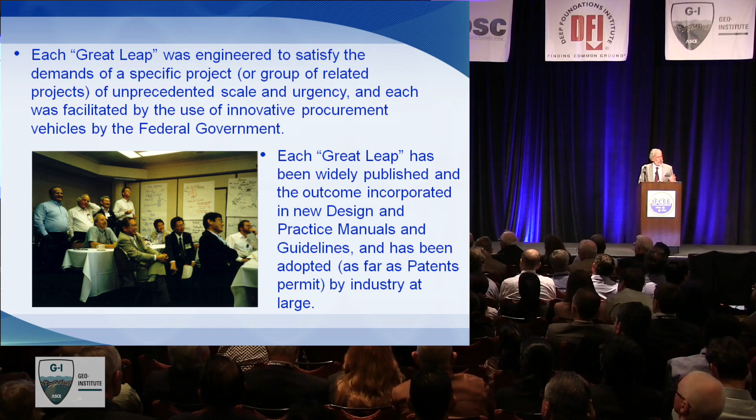The Trevi Turbo Mix - so there you go. That's my feeling for the Great Leaps. Finally, I would say that each Great Leap was engineered to satisfy the demands of a specific project. There's no question these would not have happened had the Corps or other private clients not come to the contractors and manufacturers and said, you have got to fulfill a very rigorous set of requirements. And the leap would not have happened if the demand had not been there.

It's all been published, and there is no secrecy. So just to wrap up, and this is where I'm going to go back to my notes just for a second.

You probably all know about Karl Terzaghi. This image is taken from the seminal textbook, Foundation Engineering, by Peck, Hanson, and Thornburn in 1974. Karl Terzaghi served the Austro-Hungarian Empire. He was an engineering officer in Serbia during the First World War. On November 1st, 1915, 100 years ago, he wrote, 'War and technology, like fire, are stimulating in their primitive stages, but they degenerate in their eventual achievements.' Now, I think we'd all like to think that if he were to somehow rematerialize here 100 years later, November 1st, 2015, he would agree with us that the technology in his beloved field has not experienced degradation, but has continued to make great leaps as long as there are great challenges to be faced within our profession.

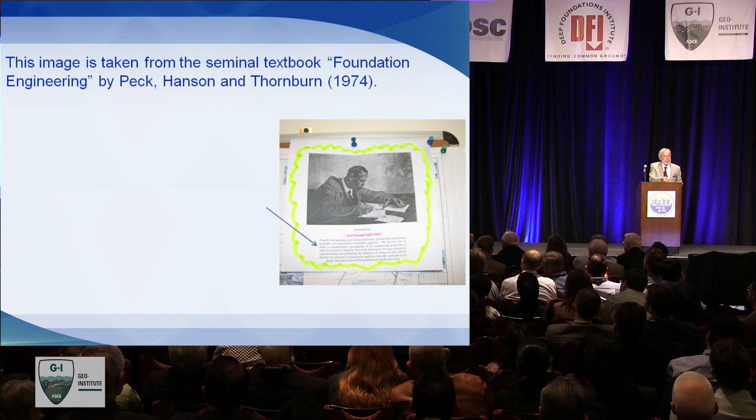Now, I know you can all read, but this is for the benefit of the cameras because I think it's important that this is memorialized. He was the first to make a comprehensive investigation of the engineering properties of soils. He created or adapted most of the theoretical concepts needed for understanding and predicting the behavior of masses of soil. And he devised the principal techniques for applying scientific methods to the design and construction of foundations and earth structures.

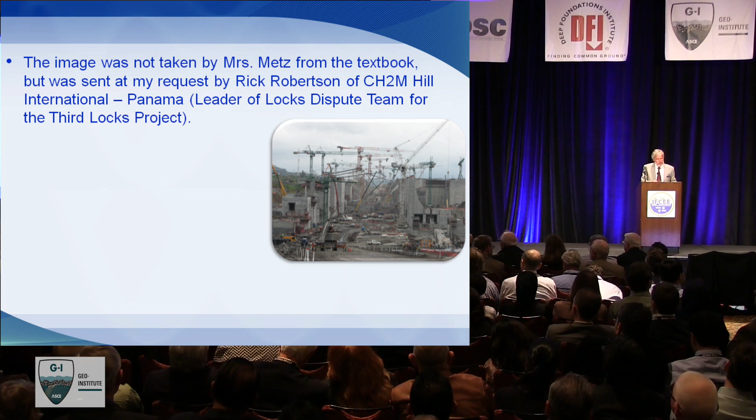Now, that image was not taken by my personal assistant, Mrs. Metz, who is with us today, from the textbook, but was sent at my request by a gentleman called Rick Robertson, CH2M Hill International in Panama. Rick is the leader of the Locks dispute team for the Third Locks project, and there's a photograph that he took recently. I do a wee bit of work for Rick on some of the things that he's doing, so he sent it to me with the cover. He's got that photograph tacked up on the wall of the office where we have all the meetings.

And it says, pinned up, watching over us in our day-to-day activities and reminding us of the observational method, bringing a smile to my face. You have a colleague, a professional engineer up to his neck in alligators in Panama, and that is his guiding light that he sees every morning when he comes down for his Panamanian coffee.

So, for me, the real legacy of Karl Terzaghi: an educator, but even more, an inspiration. A scientist, but equally a communicator - unusual in our field, eh? A genius, but in reality, the ultimate role model for all of us, despite, or perhaps because of, a well-documented love of wine, women, and song. So as I say, no one is perfect.